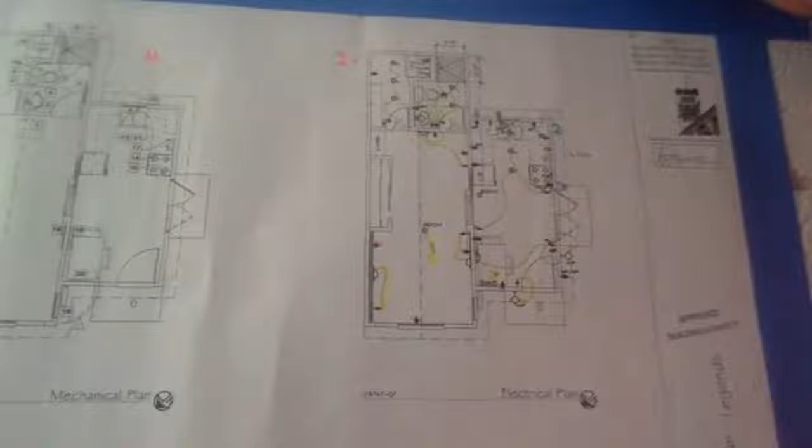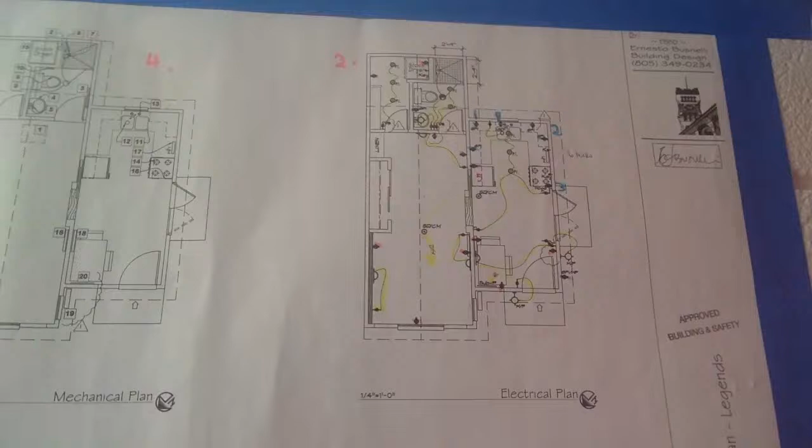Okay, so here we are on our first electrical plan, our line diagram, if you will. So we've gone through the electrical notes, we've gone through the legend, we've taken some notes, but now we're on to the plan. I went ahead and, like I said, I used 3 to 4 different color highlighters. Just makes it super easy, makes your counts easy, makes your planning easy, makes your as-built easy. When you add something, it's easy to calculate things.

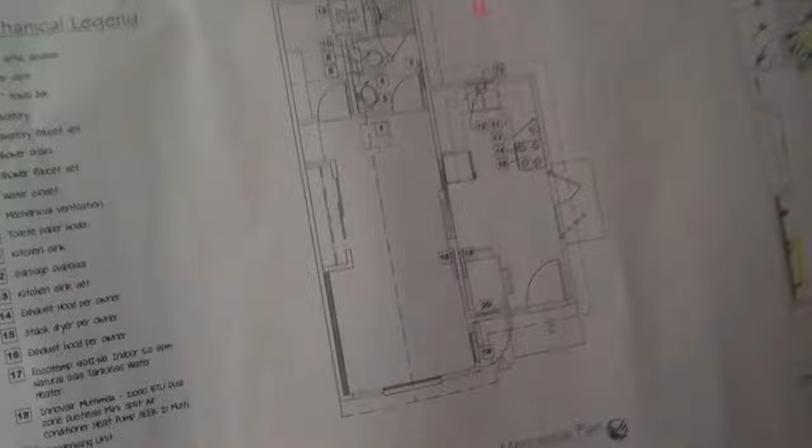So first things first, we can just work from the sub panel. This is fed from a main panel. Obviously, it's also stated over here on the mechanical legend, which hopefully you can see. Mechanical legend, it's stated as number 20. Right there, sub panel, and then there it is, 20, which obviously matches up here. So let's just go through it. Sub panel's here, that's where all our home runs are going to be.

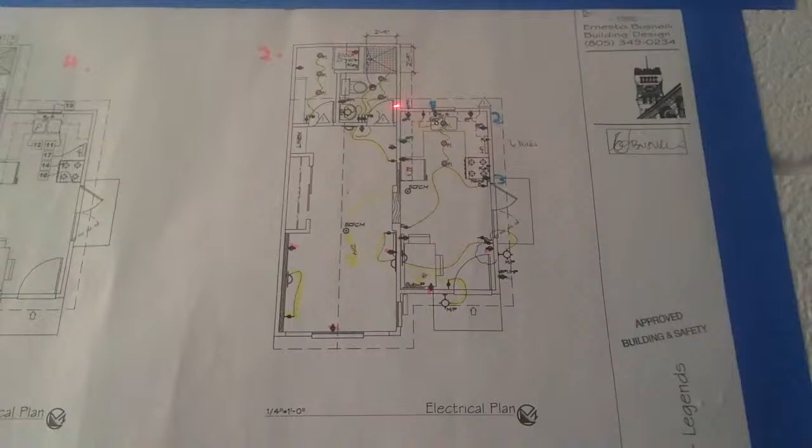I did all the plugs in pink. 1, 2, 3, 4, 5, 6, 7, 8, 9, 10. There might be a little more, but super simple. I do a circuit per room. So, it'd be one circuit here, next circuit here, next circuit in there. This is obviously a laundry. So as we know from reading the electrical legend notes, that gets a home run to that. For the dryer stack unit, the GFI in the bathroom, that would get a home run. No other plugs are on that.

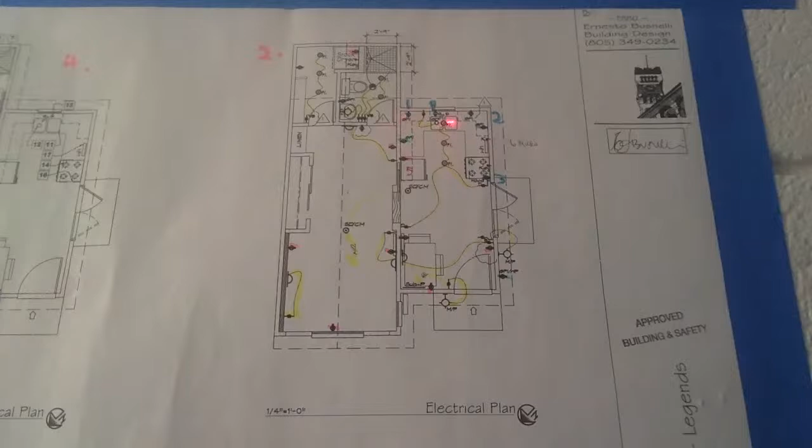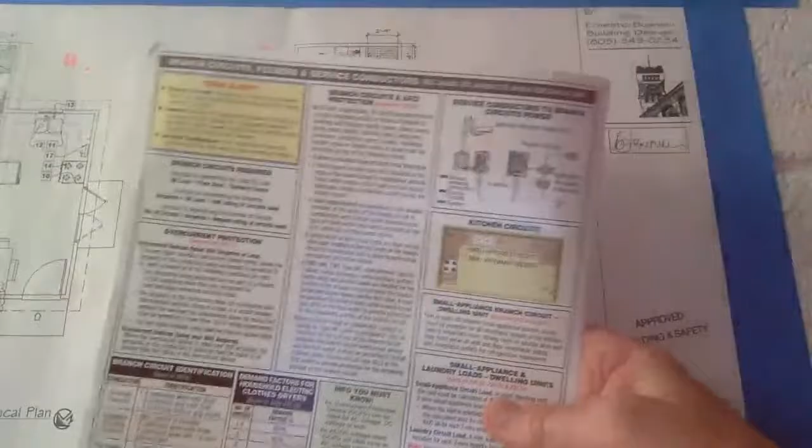And then we have our circuits in our kitchen. You have 6 circuits in every kitchen. Your 1 and 2 counter plugs for your coffee makers, toaster ovens, etc. So one side will be number 1, the other side will be number 2. And again, you reference that in your builder's warehouse right here. 1 and 2, super simple. Always have your backup, small appliance branch circuits, 1 and 2.

Then you've got your garbage disposal. Right here, this switch, the garbage disposal and dishwasher are on the same circuit. The stove and hood can be on the same circuit as long as this stove is gas. You see the key there, that's for a gas key. So obviously that's gas. Stove and hood plug, states hood right there. That's another circuit. Garbage disposal, that's its own circuit with the dishwasher because the garbage disposal you only flip on every once in a while. It draws a lot, but not very often.

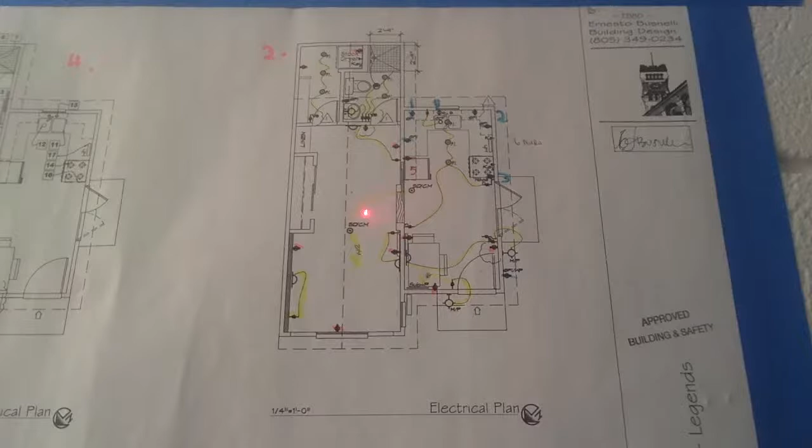Fridge on its own. So if you ever lose your fridge power, you can just plug it right in the counter. You won't lose all your food. And then there's one missing on here, the microwave. So I wrote it in. So that would be something I would talk to with the owner, the architect, or the engineer and say, hey, where's the microwave going? Because they don't have that on there, and that needs to be on its own circuit. The smoke detectors and carbon monoxide combo units, they have to be on their own circuit. So I draw a little line with a home run. It's usually number 1 in the panel schedule.

These other lighting, as you can tell, the switch goes out. This is motion sensor photo control, M/P, this one as well. So even though it's a switch on the lamp itself, you have to have that energy efficiency, the motion sensor photo control. I would do all this lighting. I mean, it's low lighting. It's not that much. I'd probably just do it all on one circuit. Of course, you have to add up all the wattages and divide with Watt's law and make sure you're 20% under your 15 amps. But knowing the size of this place, you would be.

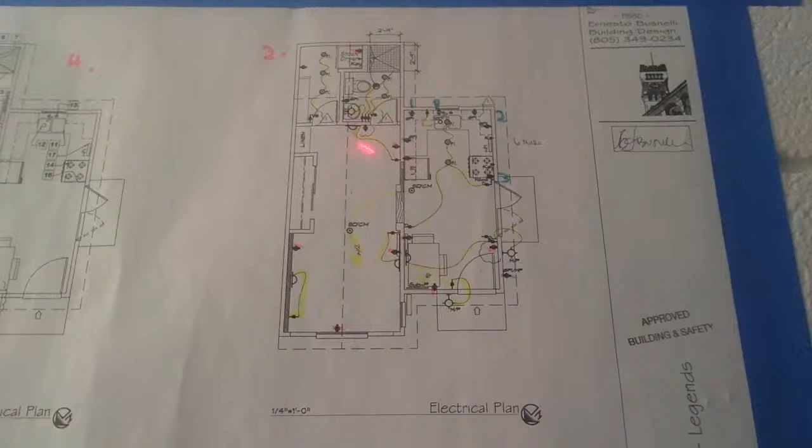So back over to the bathroom here. You've got your separate switch for your fan. This is your fan right here. You've got your vacancy sensor for your other lights, the switch with the little VS. Same with in this room. I think this is the laundry room. Yeah, it's the laundry room. So again, vacancy sensor. So always got to watch that stuff.

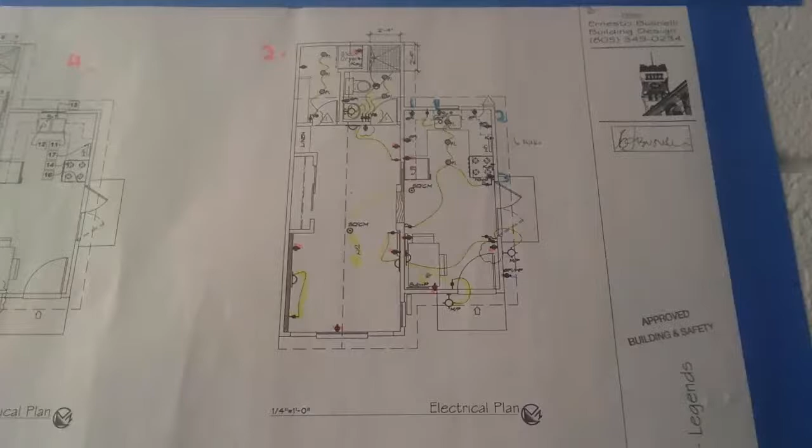These are just wall-mounted sconces. Double check that these plugs are within 6 feet of reachable wall space in each direction. You can check that again on your builder sheet. It's right there. Just double check it all. If people don't know, so go through all that.

Here's some GFIs with a weatherproof cover, water resistant cover, whatever you want to call it. You have to have a GFI at the external doorway. Here's the door in. Have to have a GFI near it. You also have to have a switch with a light. So there's that.

There's a couple notes on here showing this guy right here, light fan combination with the one. There's the one right there that refers to this one. It just talks about the humidistat and the 50 CFM, which I went over. So just make sure when you see those, you don't think, oh, what's that going on there? Yeah, double check your notes and everything will be crystal clear. So if it ever becomes too much to you, go back to the basics, like I said.

Just look at the smoke detectors. Okay, boom, boom, home run, into the sub panel, done. Just look at the lighting in one room. Okay, I got a switch here, a switch here, a switch here. 3 switches, 3 lights. Super simple, ties into the next room. There's a 3-way here door. So you come through this door, you're gonna turn on here, you go do stuff in the kitchen here, you go back in here, go to bed, whatever. Or if you leave, you wanna turn those out. Same with if you come in. So 3-way, 3-way, don't miss that.

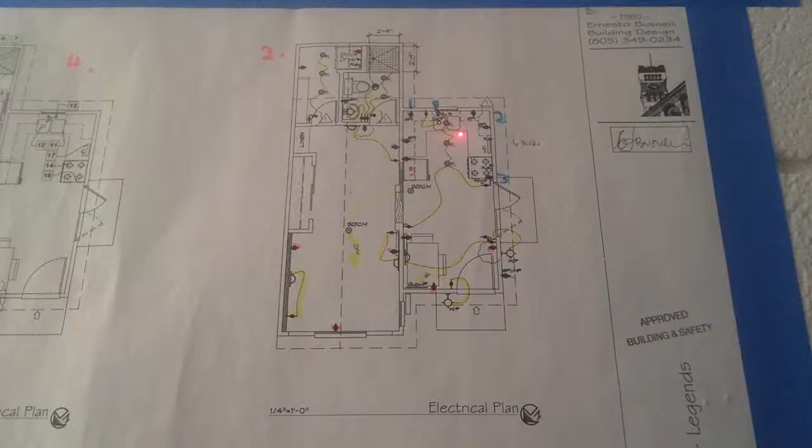Center sink light, that's generally right next to the garbage disposal switch. Or actually, that is the garbage disposal switch, sorry. So that's the switch. A lot of times they want a center sink light separate because you leave that on as a night light, or it's just more task oriented. And then usually we do under cabinet lights here too, but that's not mentioned in here, but something to upsell the customer on. So again, just get back to the basics.

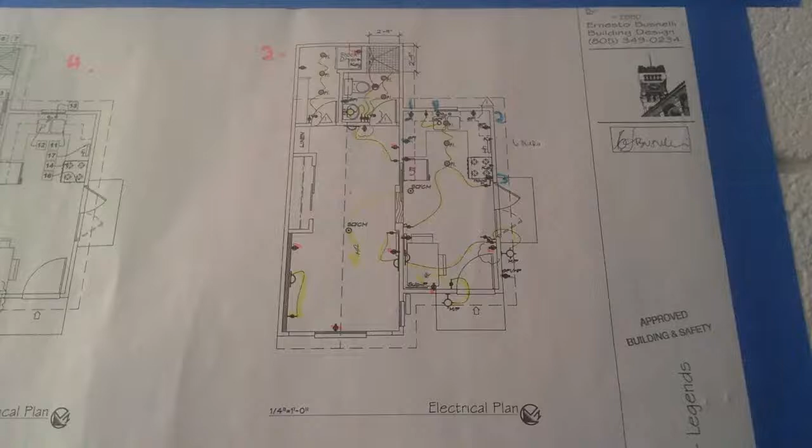If anything's ever confusing like this, you go, oh, what is this? SDS, I don't know what's going on here. Well, you know, this is a switch for out here. This one's on motion photo cell, and this is an S with a D. This is a dimmer for this light. So just break it down, do your Where's Waldo, highlight it in different colors, and it'll start to stand out to you.